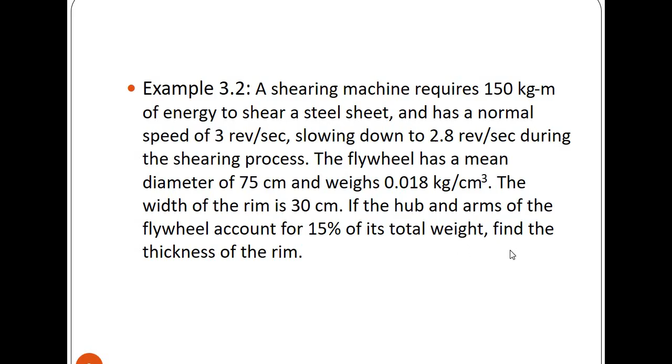Okay, so let us continue our lesson sa flywheel. Okay, so example number 2: a shearing machine requires 150 kilogram meter of energy to shear a steel sheet and has a normal speed of 3 revolutions per second, slowing down to 2.8 revolutions per second during the shearing process. The flywheel has a mean diameter of 75 cm and yung kanyang density is 0.018 kg per cubic centimeter. The width of the rim is 30 cm. If the hub and arms of the flywheel account for 15% of its total weight, find the thickness of the rim.